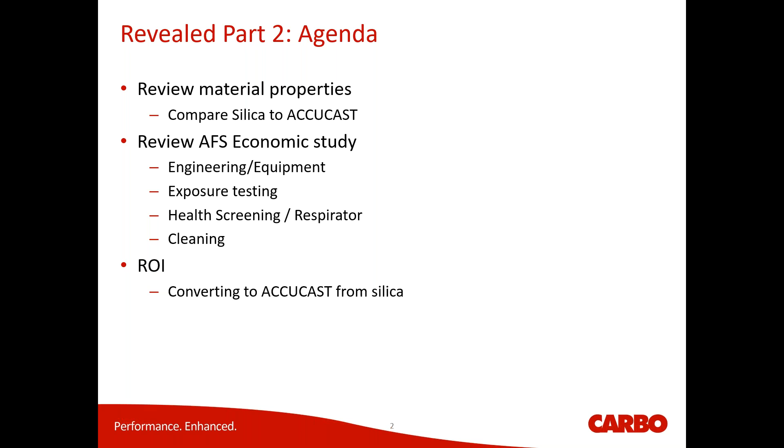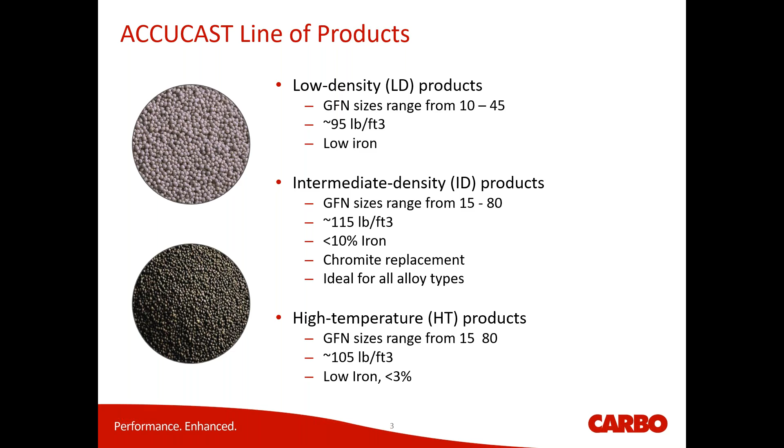In part 1, I went over the AccuCast line of products. These are our 3 main product lines, the LD, ID, and HT. If you want to hear more about them, please review part 1. I'm going to go through material properties on these now. I wanted to start by going over the thermal expansion curve.

So if you look at the silica thermal expansion, it goes through an alpha to beta transition somewhere between 400 and 600 degrees. That's where you see this rapid volumetric expansion. What that does is it causes problems like veining and other defects that you have to cope with or overcome through other material properties in the system itself. So your mold wash and other things are used to overcome this rapid thermal expansion in a lot of ways. So you start looking at the other materials.

So chromite is a very well used material. It's the next highest thermal expansion material. While it's higher than the rest of these materials, it still has a linear thermal expansion, which means that it's very predictable and has fewer problems than silica when it comes to causing defects and other issues. Next up is our LD and our ID products. They are under chromite, so again, you'd expect them to behave very well in the casting process, as they do.

Then we have our AccuCast Max series. I didn't show a lot of property data or discuss them in previous slides, because these are very specialized materials we make for very specialized industries. So we have them available if need be, but they're not in everyday foundries typically.

Lastly, I wanted to show our HT and zircon sand. Zircon sand is considered to be probably the benchmark for the best material to use in a casting process because it has such a low thermal expansion. And the HT material, when we created it last year, we were very pleased to see that the thermal expansion curve lies right on top of it. So it's basically an ideal material for the casting process.

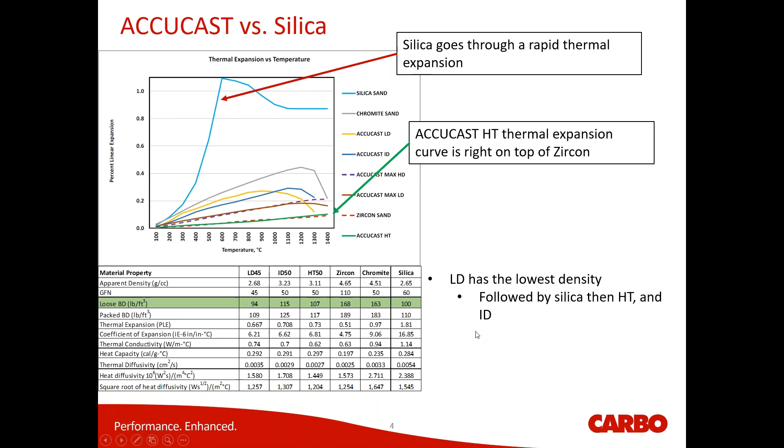Next, I'm going to get into some other material properties, mainly sieve distribution and permeabilities and stuff like that. So as you can see, I've got chromite and silica, both 50 and 55 GFN, and then I've compared to our different product lines, our LD45, ID50, ID70, HT50, and HT70. One thing I want to point out when you look at this is, since we are an engineered material, we can control the sieve distribution.

So we have typically a 3-screen sieve distribution, which allows us to have a higher permeability, that coupled with the roundness of our products. When you compare it to a chromite or a silica sand, they have 4+ sieve distributions because it's a mined material, and they can't really get down to that tight of a distribution in a typical fashion. So if you're running a 55 GFN silica sand, which is kind of a standard for most shops, the permeability is at 63.

So if you compare it to our other 50 grade ceramic materials, like our ID50, it has 222 permeability. So it's over 3 times the permeability of silica sand. So that means you have virtually no gas defects. You have such a high permeability. The HT50 again is almost 3 times.

So the other way to look at this is, if you've got 63 permeability on the silica sand you're using, you can actually step down to a smaller size ceramic material like the ID70, as we talked about in part 1, and still have a permeability that's at or above your silica sand. In this case, we're above by over 20 points on both the HT and the ID70.

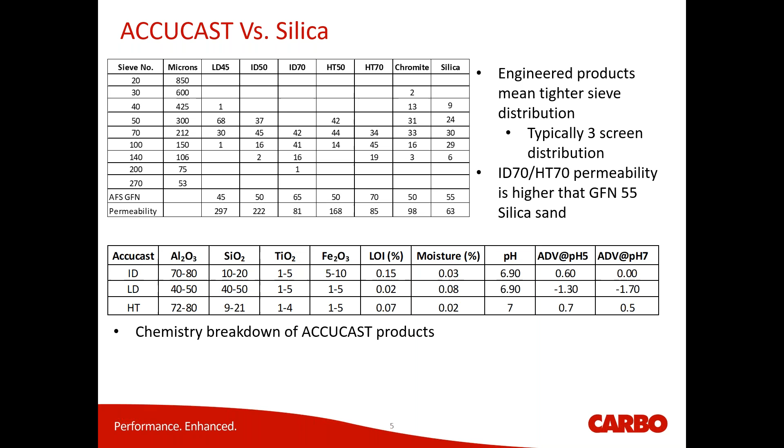Testing required for OSHA PEL. So what we want to do now is, as I mentioned, we're going to walk through the AFS study done to understand how much it costs you to maintain a silica system under the new PEL requirements. So first, where I'm going to start with is the actual PEL exposure testing.

So PEL exposure testing is where you put an apparatus on the individual and they do their job. And it's mainly to look at, in an 8-hour shift, how much silica dust do they get in contact with. And I should clarify that by saying how much crystalline silica dust they get in contact with. So the costs associated with doing that test are laid out here by AFS's economic study. So the industrial hygienist time and travel, they say, is about $1,600, and that's paid per day at the shop.

Also, I want to mention at this time that that $1,600 covers only 1 day, and they can only do 8 job tests per day. So if you have more than 8 job tests, you have to pay for an additional day. And that will be discussed when we get to this large foundry here. Lab fees are $600 per job. So the total per test is $2,200.

And the other thing I want to mention is you actually have to do this 4 times a year if you're above the action level of the PEL. So the action level is 25 micrograms per meter cubed. The PEL limit itself is 50 micrograms per meter cubed. So that means if you're above that 25 micrograms per meter cubed, you have to do this test now 4 times a year. So including that in this cost, it's $733 per month. I've broken it down to months because in the ROI calculator, that's how we're going to put it in. So I want to show it by a monthly expense.

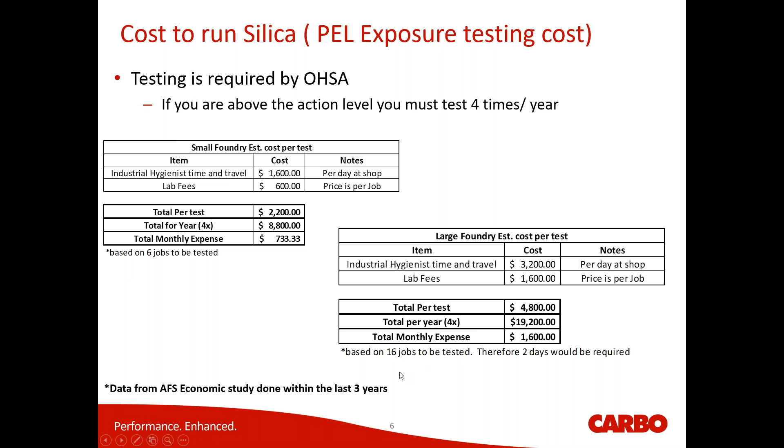Now we're going to get into health screening. So health screening needs to be done right now, or needs to be offered to the employee if you're above the PEL limit of 50 micrograms per meter cubed. As of June of 2020, the requirement is going to change to where if you're above the action level of 25 micrograms per meter cubed. So in that case, what is all involved in this?

Well, you got to do the physical exam, which is $800 per exam. Then you have to pay the employee for their time away from work still, even though they're on the test. So they're figuring that's 2 hours away from work. And then you have the drive time you have to pay them for. So they figure that to be at least 1 hour. So a total cost per employee is $920.

Now we get this down into small versus large foundry. They said for a small foundry, they're thinking probably about 10 people would be a good number to use to say that that's a small foundry. So the total yearly cost is $9,200, and the total monthly cost is $766. A large foundry, they're saying somewhere around 30 employees need to be tested. That brings you to $27,600 per year, and the monthly cost of $2,300.

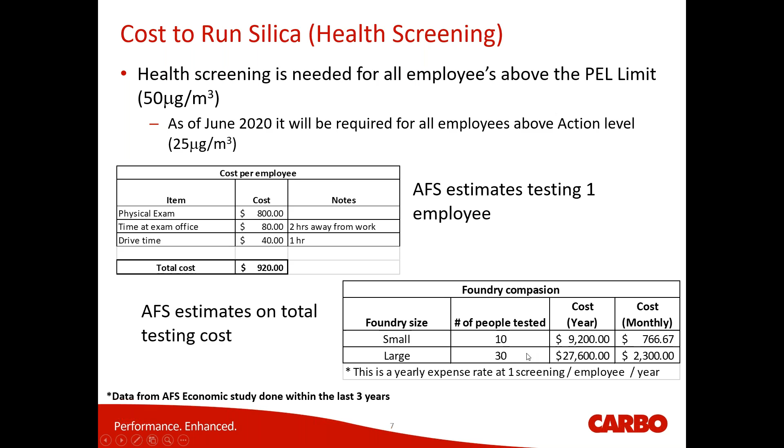The next thing we're going to get into is a respirator program. So if you have anybody that's working in an area that is above the OSHA PEL limit, you have to have them on a respirator. If they are above the action limit, you could have as part of your action plan to put them on a respirator. That's totally up to you.

So with those 2 comments in mind, this is what AFS feels is going to happen at these different small and large foundries. The total cost per employee to put them in a respirator is $1,100. For a small foundry, again, they're going to use a number of 10 people that they feel will be put on a respirator. So a yearly charge of $11,000, or a monthly expense of $916.

For a large foundry, they're saying, again, around 30 people, or equates to $2,750 per month. The other thing you've got to do with a respirator is you've got to have a record-keeping process in place to take care of it, and training. So what AFS did is they looked at it and said, probably 1 week a year is enough time to handle both the record-keeping and the training.

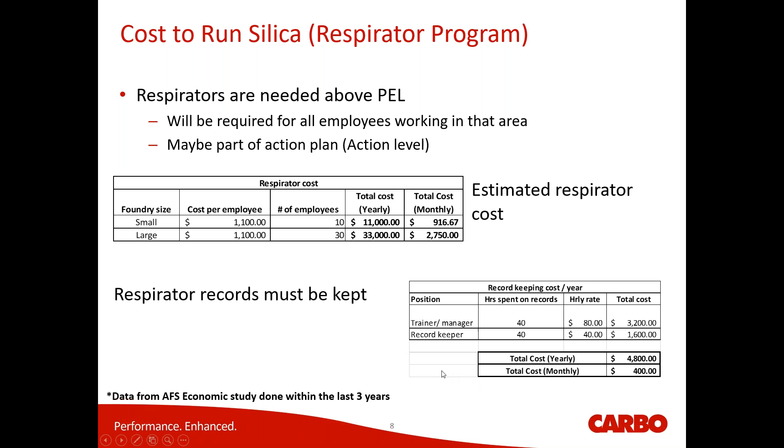But that takes 2 people. One is a manager to properly oversee everything, and you've got to have somebody clerical doing the record keeping. So basically, we've broken those 2 down, and we say a yearly expense of $4,800 to have them keep those records. Total monthly cost of $400. Now, the reason why I only show this once is whether you're small or large, no matter how many employees you have, you're going to have to pay these people, and they're probably going to have about the same amount of time, is what AFS felt.

So now we get into cleaning costs. You have silica in the shop. You've got to clean up according to the new OSHA PEL. There's certain things that you have to do differently when you do that. So one is you can't use compressed air anymore. You can't blow around this material because it's deemed to get up in the air and cause you more harm according to OSHA. And you're not allowed to use a broom really anymore. So you have to use a vacuum. And that costs money to rent these different vacuums or equipment that you need, or to purchase it.

AFS took a stance of you're just going to be renting the equipment, and so this is the cost they feel is associated with it. So first off, you have the equipment rental cost here, then you have the employee time cost, how much time the employee is going to put into doing this, and you have the lost production costs of the employee taking away from his job and losing the parts that he could have been making.

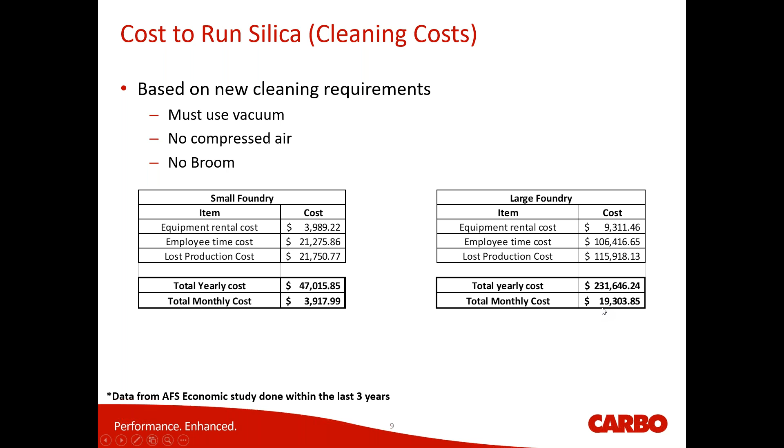So that altogether for a small foundry equates to $47,000 roughly, a total monthly cost of $3,917. For a large foundry looking at those same three things, they're seeing a total yearly cost of around $231,000 or $19,000 a month. The last thing that they looked at with this is doing engineering or equipment upgrades. So dust collection or other engineering controls that you would need to put in place to properly mitigate the silica dust.

So AFS broke it down by alloy type. As you can see, in iron foundry, they believe there would be right around $2.4 million in engineering and equipment upgrades to meet the new standard. Non-ferrous, they say right under $1 million. Other ferrous, they feel will be about $1.7 million. For the sake of this ROI, I'm going to just say $1 million, because looking at these, that seems like a safe number to use if you're going to go engineering and dust collection and other things. So you are looking at spending somewhere around that kind of dollar figure.

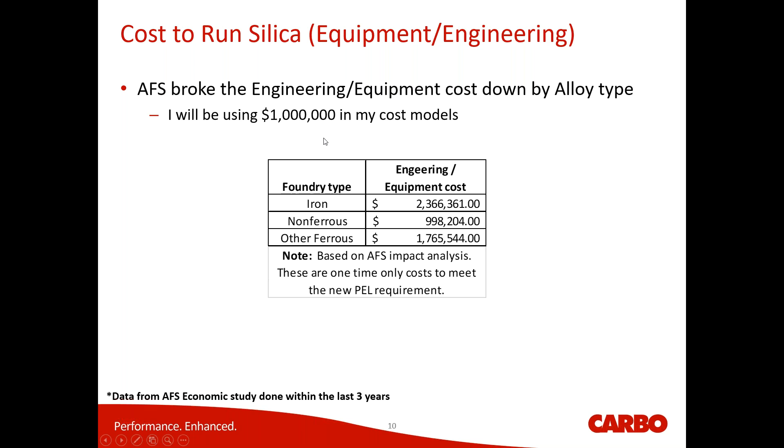So now we're going to go into the ROI calculations. What I'm going to do is jump over to the Excel sheet I have for the same one. This is a large no-bake shop we have in here, and I'll kind of walk through these numbers and also play with it some and show you how this calculator works. So first of all, I have CARBO in there at $1,000 a ton and silica in there at $100 a ton. These are budgetary numbers. These are not 100% correct, but they are getting you in the ballpark of what each are going to cost. And I know you guys are probably saying I don't pay $100 a ton for silica. We will adjust that number here in a moment. You'll see how that affects everything.

For a large facility, I'm just using the number of 1,000 tons. I think that's a good number to say that's definitely a large facility in my opinion. So 1,000 tons at $1,000 a ton is $1 million. I also have built in here $500,000 for reclamation equipment. Now, I can't say everyone's going to have to buy reclamation equipment. It all depends on your shop, your usage.

So if you're saying the metal ratio is right, you don't need thermal. And most likely in a no-bake shop, you already have mechanical, so you would not need reclamation equipment. Also, depending on your mechanical reclamation, you might not need thermal because it might be aggressive enough where you don't need to do it. There's lots of things that we can get into there to say, do you need reclamation equipment or not? So while I have it in here, it's more just as a placeholder to say, you could end up spending money on reclamation equipment, so I want to have something in here for that.

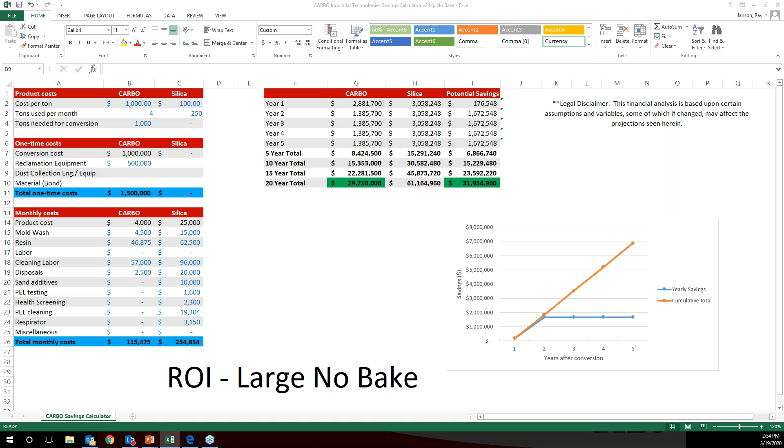So there's a lot of ways we can play with this and show how it works, and it's all very interesting to see how these numbers play out. People that tell me that it's too expensive, I like to say, hey, we need to look at this and go over it, because I don't think you understand everything that's going on here. Now I'm going to switch back over to the presentation and we'll walk through some other examples. So this again was a large no-bake. We just walked through all the different examples and showed you how the chart works.

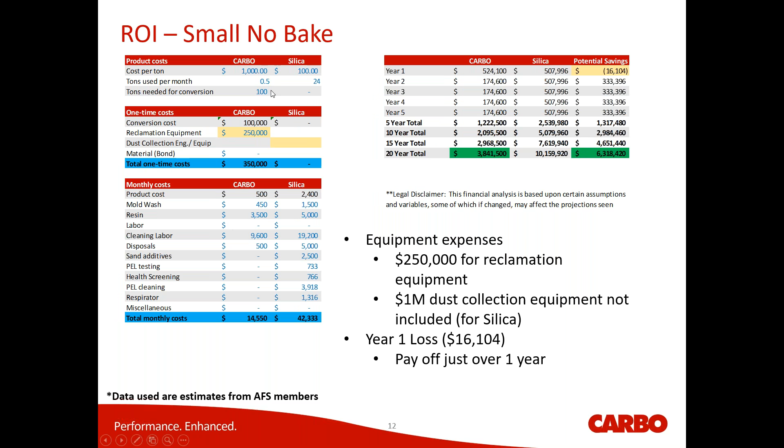So we get to a small no-bake. I consider it to be a small no-bake because I just put in a 100-ton conversion. So $100,000 worth of material, and we have reclamation equipment in there of roughly, again, $250,000. What we see here is that at the end of the first year you have a slight loss at $16,000. But basically, instead of it being a 12-month payoff, you're going to be at a 13-month payoff. So you're going to pay it off in the very beginning of the second year. And again, this does not include the $1 million dust collection equipment for silica if you were going to stay with it.

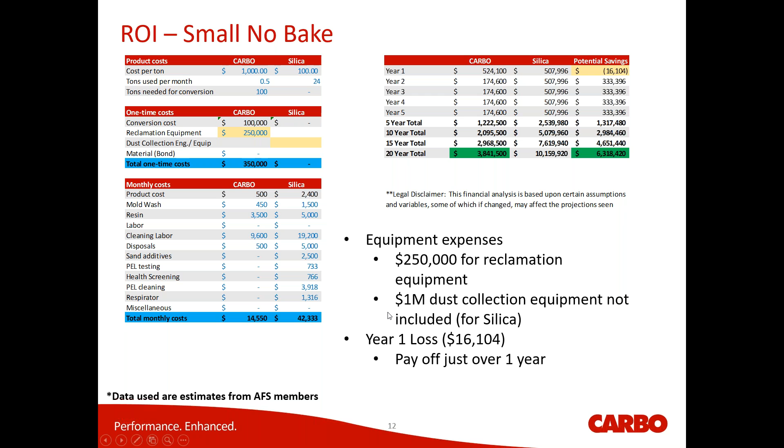Getting into a large green sand shop. Again, I have $500,000 in there for reclamation equipment, which you may or may not need depending on your setup. If you don't run any cores and you're all mechanical and you already have a mechanical system in there, you don't need any reclamation equipment. So again, it's all how are you set up now? What are you looking at? Whether you need to spend this. Again, I don't have any money in there for the silica dust collection.

Based on this model as it sits right now, you would, at the end of the year, still be $166,000 behind. But at the rate you were making up your savings each month, it would probably be like a 14-month return on your payoff. And again, as I mentioned already, these numbers are estimates based on what we've seen from people. We have people that have shown a lot better than these numbers. There are people who have converted green sand shops that are showing their rate of return is around 8 months or better.

So this is just for you to see right now. A small green sand shop, again, 100-ton system. I have $250,000 in there for reclamation equipment, nothing in there for dust collection. You're seeing at the end of year one, you're still about $41,000 behind your investment. Again, this would be probably 14 months you'd have a payoff, or 13 months based on these numbers down here. So again, you're talking just over a year you would have paid off the project and you would be then making money off of the project.

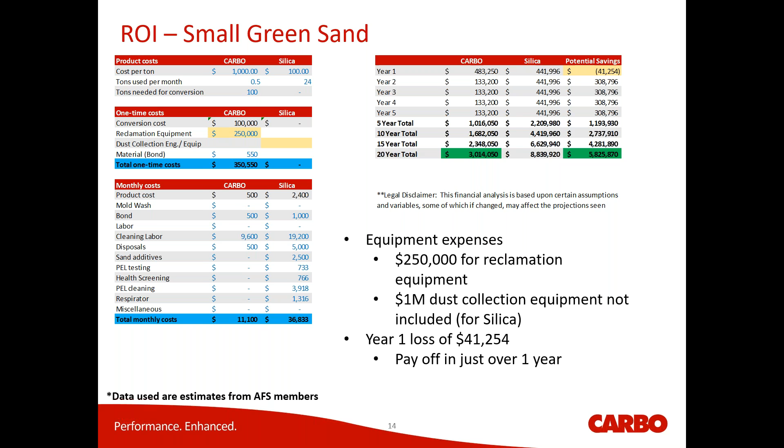And you can see by these numbers, after 5 years, you would have made $1 million on doing this conversion, or saved $1 million, I should say. A large lost foam plant. Again, we're looking at a 1,000-ton plus system is kind of what I'm using as a large system. $500,000 in there for reclamation. You may or may not need it.

Again, lost foam, the only thing you would need is maybe thermal. And if you already have one in place for your silica system, then guess what? You don't need to spend that money. I don't have anything in there for a dust collection system. And we're seeing a payoff within a year. We're seeing a $43,000 positive at the end of year one with this.

The other thing I want to mention with lost foam is we've got a lot of data that shows that you do see an increase in production. So while I can't show the reduction in scrap in that number, because it varies from customer to customer, how I've broken that down is I've said if you are operating a certain amount of workforce to make the same amount of products with silica as you are with CARBO, you're going to see a reduction in your labor fees because you're not going to have to work them as many hours to achieve that same number. So that's built into this as well.

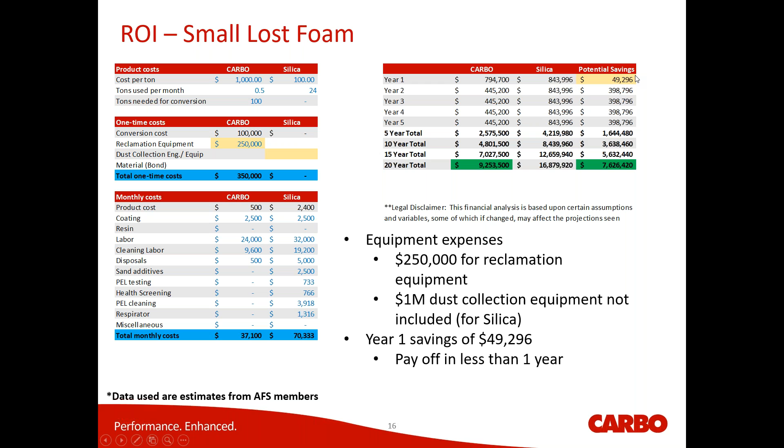Small lost foam, again, you're talking about 100 tons to convert, and I have $250,000 for reclamation with all the same type of stuff we've used in the other ones. You're seeing a payoff of less than a year again. So that's all I have right now. I'll open up for questions and hope you all enjoyed the presentation.